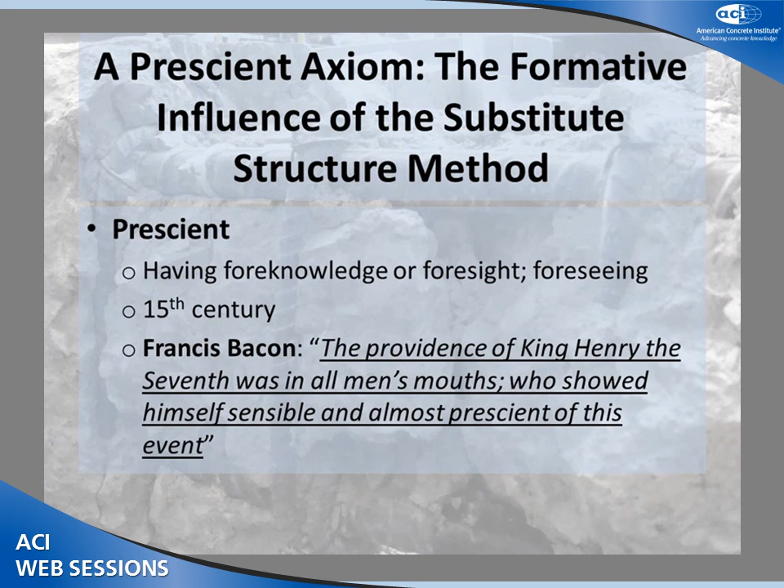The next word that I looked up was axiom. And again, as you all know, largely because we are in the sciences, an axiom is a proposition that commends itself to general acceptance, a well-established or universally conceded principle, a maxim, rule, or law.

Its first occurrence in recorded history is also in the 15th century, and I was surprised to find yet again a reference to Francis Bacon as one of the early users of the word.

My high school education, I'm sure, brought up Francis Bacon, but I really didn't remember all that much about him. So my next step was to look him up.

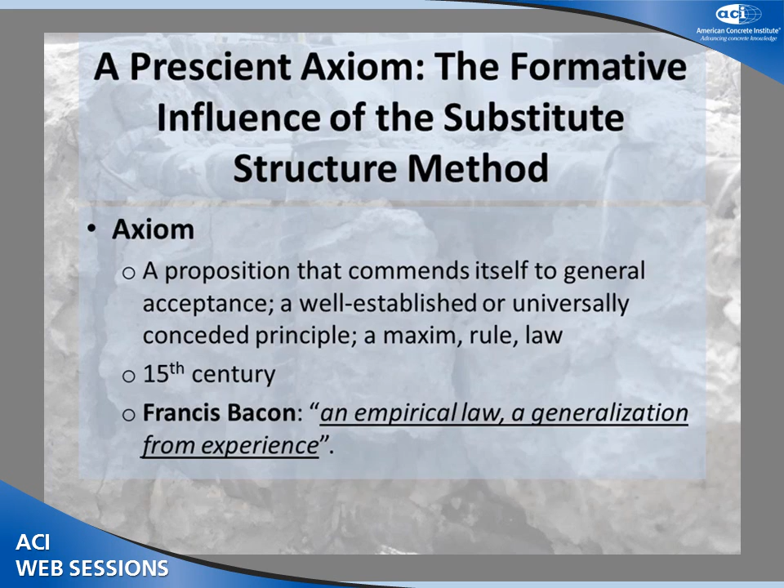And here's what I found, that Francis Bacon was a philosopher, statesman, parliamentarian, scientist, jurist, and author. He's actually credited with being the first modern empiricist. He's credited with being the developer of the scientific method.

He was a proponent of the inductive method of reasoning, demonstrating what is so by negation of what is not. He's known for deriving general axioms from what he called particulars, which were particular observations made during the course of scientific experiments or observations of nature.

Of interest to me is that he idealized physics into two branches, mechanics and magic. Some things never change. I guess at the end of this little inspirational exercise, what I decided is that Mete A. Sozen is kind of a modern-day Baconist, perhaps even a modern-day Bacon, who has really brought Baconian logic and reasoning and merged it with earthquake engineering to advance what it is we all do.

So with that as an introduction, I'm going to start discussing the pre-substitute structure era, the dawn of earthquake engineering in this country.

I'll pick up the pace here because I've got to get through this stuff fairly quickly. This all started really in the 1927 UBC, where earthquake engineering principles were in the appendix. The base shear coefficient at that time was 7.5% of dead plus live when the building is on firm soil, and 10% otherwise.

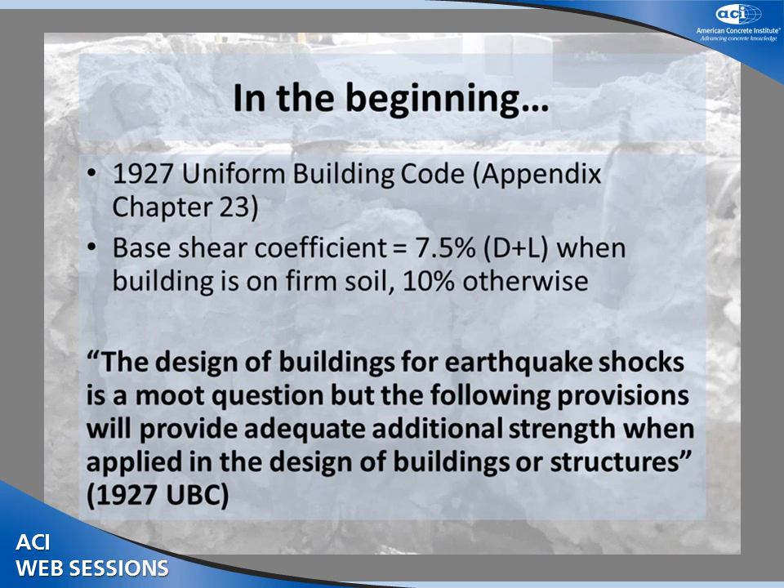The 1927 UBC contains this interesting quote. I have no idea really what it means, but it's interesting nonetheless: the design of buildings for earthquake shocks is a moot question, but the following provisions will provide adequate additional strength when applied in the design of buildings or structures. An interesting choice of words, a moot question, but I guess it tells us that back in 1927, engineers weren't quite so sure about what they were doing.

Advance to 1935, Uniform Building Code, the base shear coefficient reduced markedly from 7.5% of dead plus live to only 2% of dead plus half live. This particular reduction carried on through the 1946 edition of the Uniform Building Code.

I personally don't know the reason for the reduction. Perhaps it was related to the economy of the times when, in the Great Depression, the cost of building materials was very high, and we all sought means to cut back.

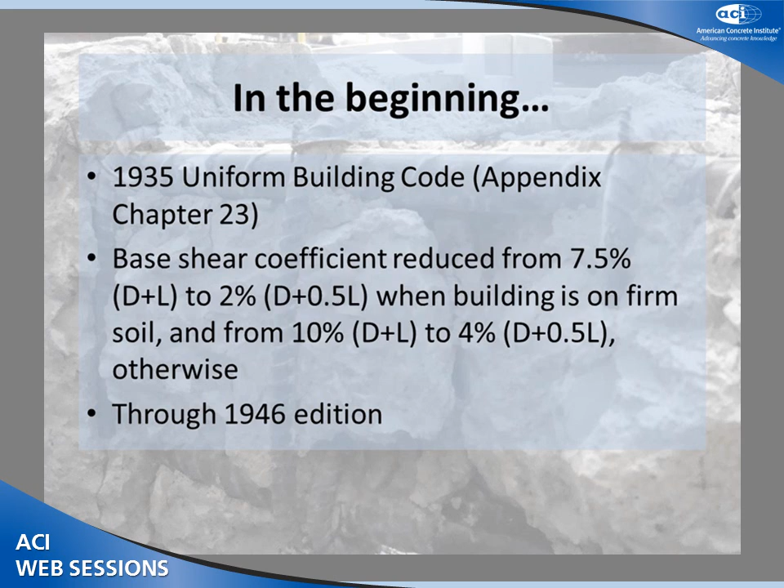In the 1949 Uniform Building Code, we suddenly have a change from the clearly statical mindset of the earlier building codes into something that seems to begin to accommodate the potential for dynamics as at least a player in the earthquake engineering problem. In 1949, we introduced a seismic coefficient that varied as a function of the number of stories, and as a building being designed got taller, the seismic coefficient went down.

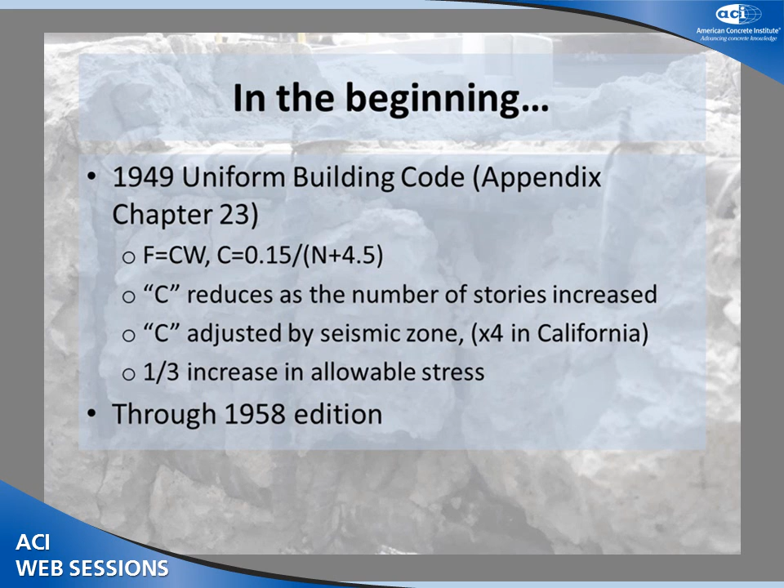This change kept in place through the 1958 edition of the Uniform Building Code. Now, stepping back a bit, in 1952 the San Francisco section of ASCE and SEAONC developed the first model lateral force provision specifically designed based on what they thought at the time was the best way to bring dynamics into the earthquake engineering design philosophy, and they did that by expressly introducing the concept of the period into the formula.

In 1959, the SEAOC Seismology Committee published the first Blue Book. In 1960, the Seismology Committee published its first commentary, and the recommendations of these committees were ultimately adopted into the 1961 Uniform Building Code, which contained a fairly radical departure from the earlier codes.

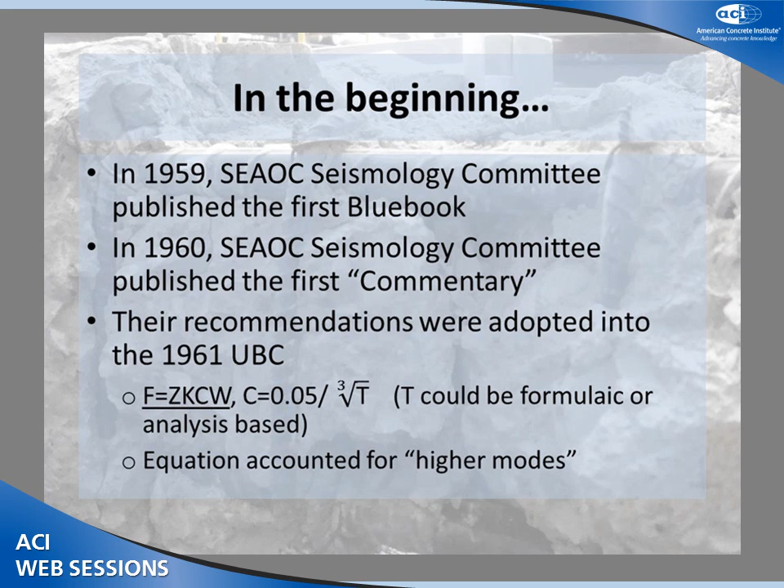It introduced a formula that accounted in some way for higher modes, and it introduced a coefficient K, which to some degree attempted to accommodate the notion that all buildings are not the same, and all building types are not the same. All structural systems are not the same.

Of particular interest to this session, the 1961 UBC incorporated a brand new concept. It essentially said that structural framing systems in buildings more than 13 stories or 160 feet tall were required to be ductile. That code specifically credited steel frames with moment-resisting connections as automatically being ductile. Other systems, however, such as reinforced concrete, were required to be proven by tests and studies to provide equivalent energy absorption.

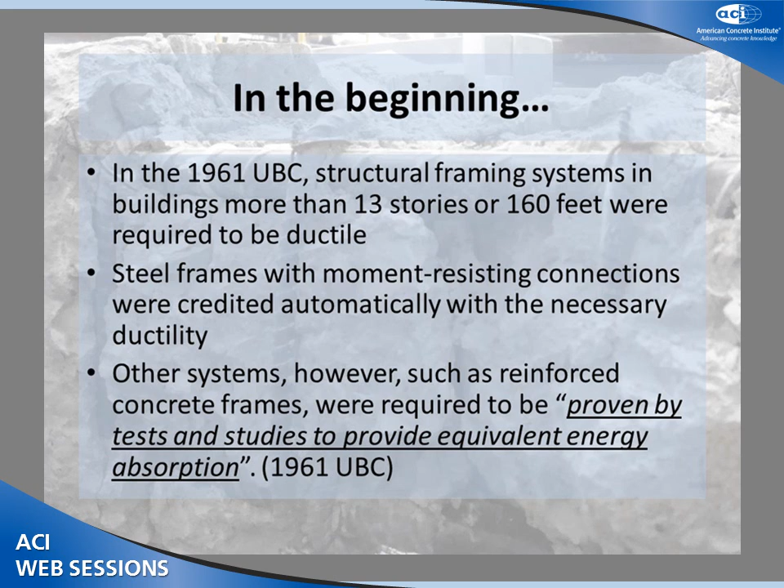This was the first indication that we practitioners in reinforced concrete had a somewhat higher hurdle, and thus there became an instant need for the 1961 book, which is the subject of this session. One might argue this is the reason for its existence. The book is a classic, and it contains much of what remains relevant today.

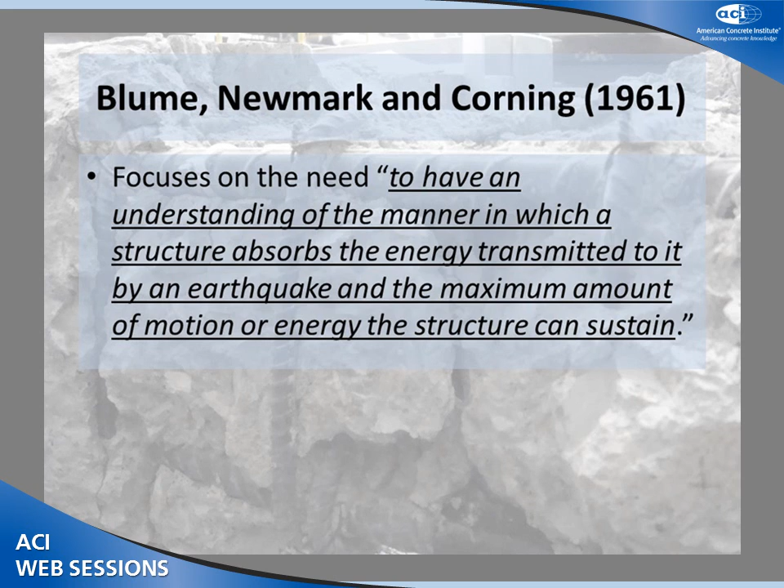Turning to that book, as Jack indicated, but in the words of the book itself, it focuses on developing an understanding of the manner in which a structure absorbs the energy transmitted to it by an earthquake and the maximum amount of motion or energy that the structure can sustain. This, at the time, was a brand new concept to the profession, and these folks really sought to characterize this concept and to transmit methodologies for accommodating it into the profession.

The book focuses on many things that underlie practice today. I'm not going to talk about all of it because really my subject is not the book, but is substitute structure, which came after the book.

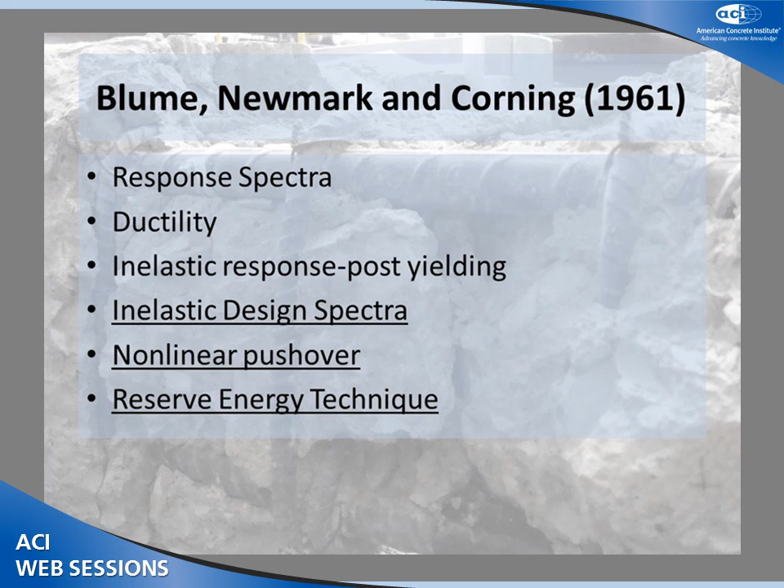To set the stage for the context from which substitute structure arose, I'm going to talk for a few minutes about inelastic design spectra, nonlinear pushovers, and the reserve energy technique.

I actually learned a tremendous amount that I'm going to share with you here in going through these books. It's interesting that the book contains only a single page of what I'd call conceptual discussion of inelastic design spectra. I'd read it before, looked at it 100 times, but it never quite occurred to me that the concept of inelastic design spectra brought out in the book was really in its infancy here, even for Blume, Newmark, and Corning. It was just being developed.

The theme I'm going to develop for you in the next few minutes is that there's a clear development of the concept, an evolution of the concept of inelastic design spectra over the course of 10 years. In any case, the book puts forth as postulates the notion of equal displacement and equal energy.

What's interesting to me in reading it is that the book never ascribes, as we would today, applicable period ranges or ranges of the spectra to either of these concepts. It doesn't talk about constant periods, and it doesn't specifically attribute equal displacement to just long period structures, for example.

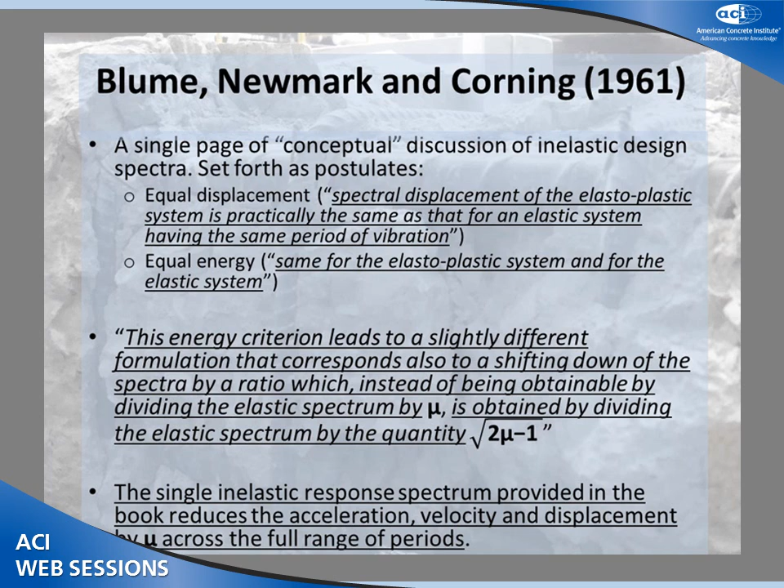Ultimately, I'll show you in one second that the single inelastic design response spectrum the book contains reduces the acceleration, velocity, and displacement by mu across the full range of periods.

This is the diagram from the book. I expect it'll be a little hard to read, so I've highlighted it for you. The upper curve, solid as denoted on the diagram, is the elastic response spectrum. The lower curve is the elastoplastic response spectrum. You can see the annotation that it's for mu of 4 to 6.

There is nowhere in the book that it specifically says this is the spectrum that should be referred to when trying to derive inelastic accelerations, say, or when trying to derive inelastic displacements. It appears to be the curve from which the designer is supposed to derive both, which is fascinating because this is precisely the concept that changed a number of years later.

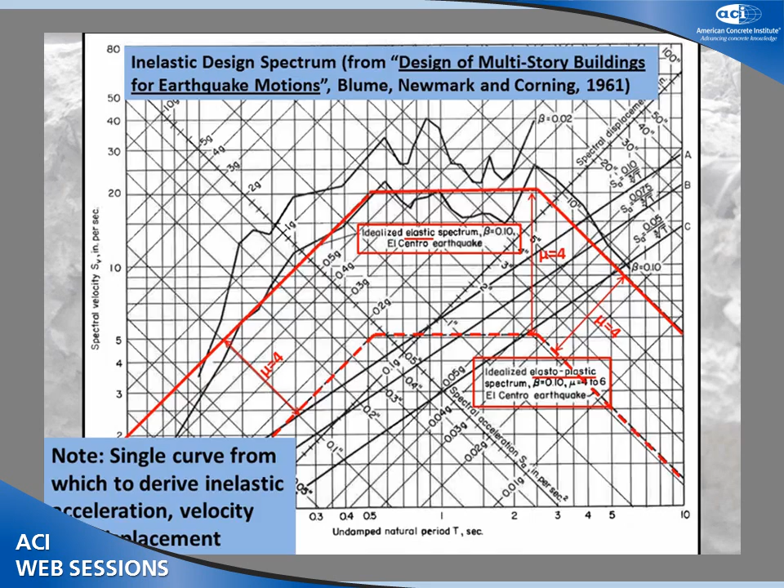At the same time, the book contains in the appendix a detailed description of another brand new method called the reserve energy technique, which was really Blume's method. The method relies in part on force displacement pushover type analyses. We all know what they were.

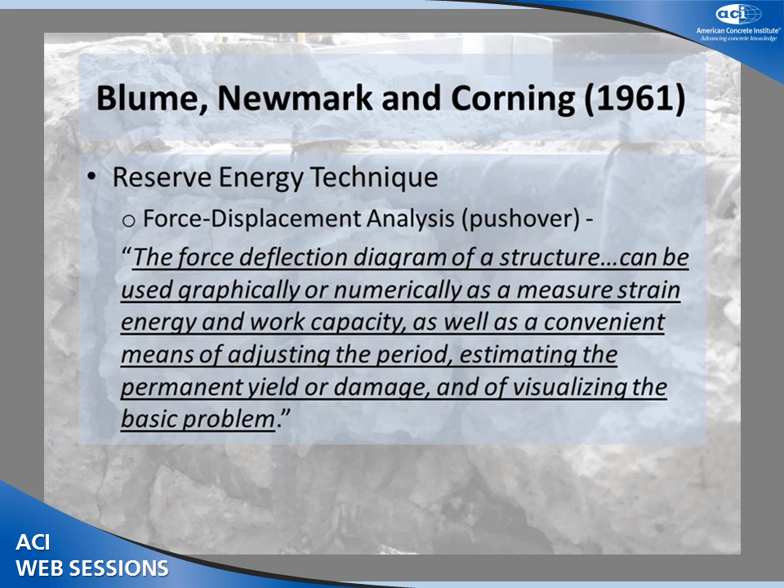If you read Blume's words, you can see that he's really thinking in a manner that we think today. This concept of looking at strain and energy and work capacity, as well as the notion of period shifting that he began to introduce, is really what we look for today as we evaluate and analyze structures.

This is Blume's diagram, which I'm not going to talk about in detail regarding reserve energy, but I do think it's interesting to point out two things. First, Blume is already thinking not just of the stiffness of the frame, but the stiffness of the frame and all the stuff that goes along for the ride and might participate in the process and might be non-ductile.

And again, for 1961, this is pretty advanced, I think, because there are lots of engineers who still don't think about that today all that well.

I also find this little diagram interesting, which I think is testament, if you read the words of the book that accompany it, that Blume acknowledges at this time it was very difficult to deal with entire building systems. The computational effort required really made him focus on single-story type studies, and that's what that diagram represents.

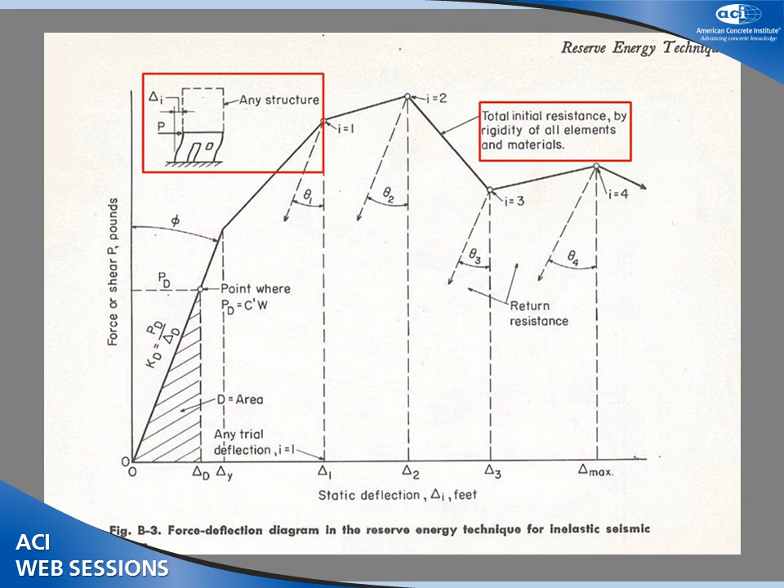This is a diagram that's not from the book, but it is John Blume's reserve energy technique. It's actually taken from a paper of Sig Freeman's from a while ago, in which he dissected the reserve energy technique based upon his long use of it. I'm going to point out a couple things: the technique, at least as drawn here, is only applicable in the constant acceleration range, the short period range. This really is fundamentally the technique.

You'll note that in accordance with this plot, this promotes equal energy, not equal displacement. The displacements, the elastic and inelastic, are clearly different. They differ by a factor mu. And in fact, the elastic and inelastic accelerations differ by a factor of the square root of 2 mu minus 1.

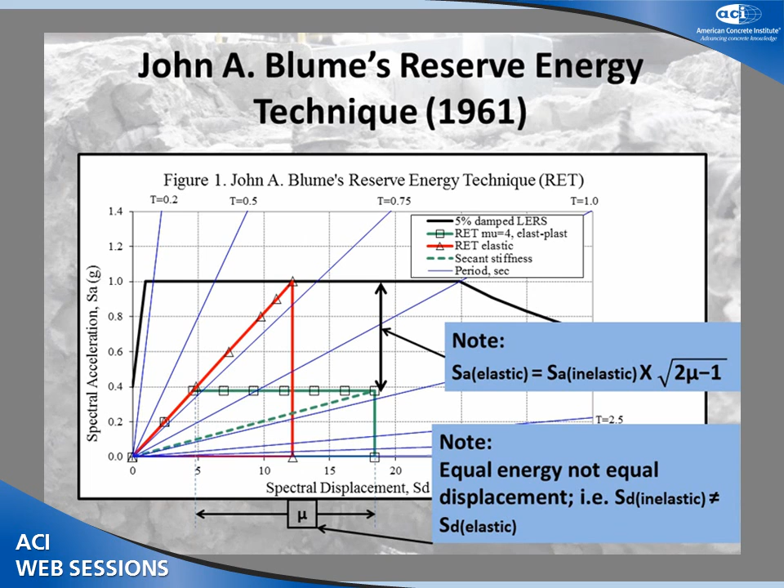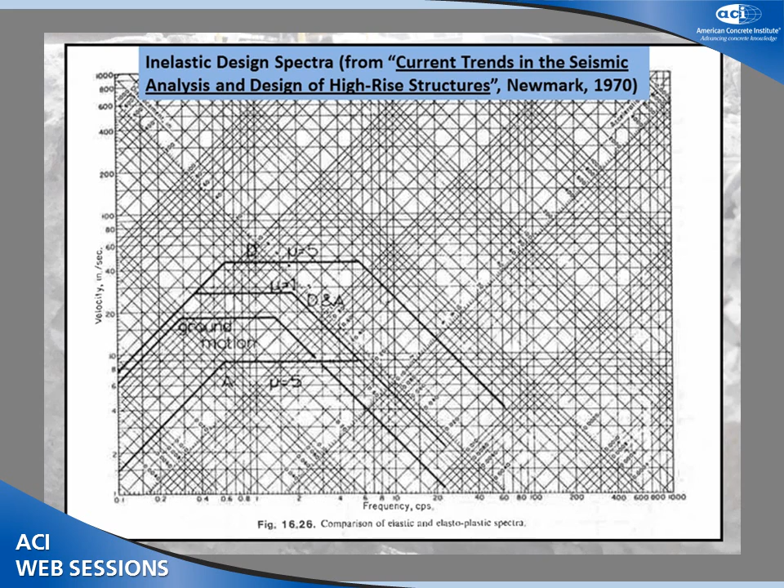Moving forward, time marches on. In 1970, in a paper called Current Trends in the Seismic Analysis and Design of High-Rise Buildings, or structures, Newmark introduces yet another variant on the inelastic design spectrum. At least this is the first variant that I've found, in which he proposes, essentially, that you can't have just one curve to identify the inelastic accelerations and displacements, that you have to have two separate curves.

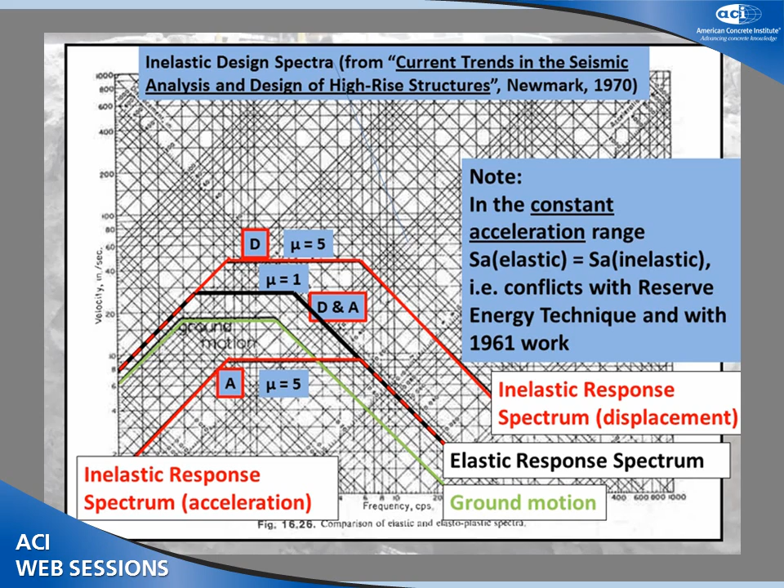What I will call out here is that this conflicts with the reserve energy technique, and with the work that he himself presented in 1961. And I'll point out one other thing here, or two other things.

If you look in the constant velocity range, what's fascinating is that in this particular depiction, the elastic spectral acceleration differs from the inelastic spectral acceleration by the square root of 2 mu minus 1. But also in the constant velocity range, the spectral displacements differ here by the factor of mu over the square root of 2 mu minus 1.

The reason I'm going through all of this is to tell you that when I learned of the inelastic design spectrum technique, I always felt that these guys had tapped into a fundamental law of nature, kind of like pi or E, that the square root of 2 mu minus 1 was a bit of magic they'd uncovered. But the reality is these guys during this time frame were fishing around for the right answer. You can almost imagine Blume and Newmark arm wrestling over what the right factor ought to be in what part of the spectrum.

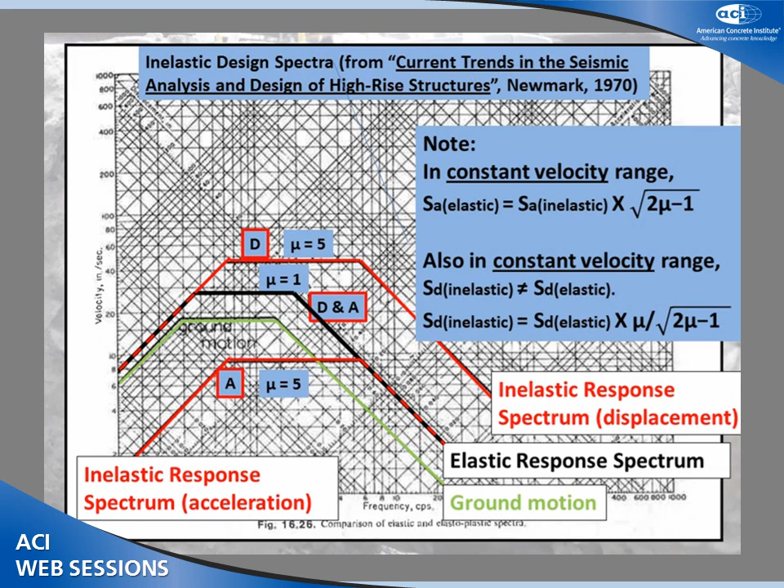It's fascinating to watch the development because even this presentation of the inelastic design spectrum was to change yet again in 1973. This is the form we know of it today, where in the constant velocity range, the elastic spectral displacement equals the inelastic displacement. Again, to contrast: here, in the constant velocity range, the spectral displacements are clearly different, elastic and inelastic. Here, they're not. Newmark has incorporated kind of a transition period range in which he goes from one curve to the other.

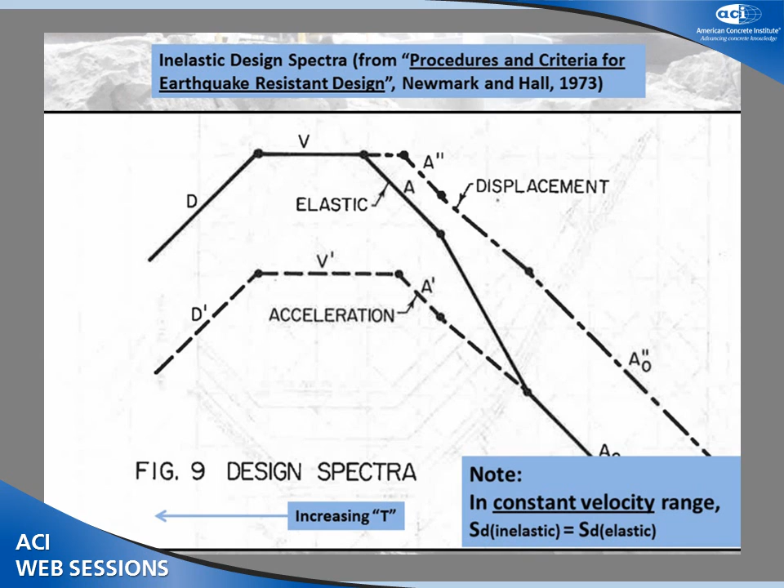This must have been a tremendously exciting time in earthquake engineering, because the early 70s is really a period of a few years when I think tremendous stuff was happening, including this.

Also in this time frame, in 1973, perhaps coincidentally, is when my co-author, while working for John Blume, first developed the capacity spectrum method, which was developed specifically to very quickly assess over 100 buildings. He was requested by John Blume to use the reserve energy technique to do these assessments, but found in applying it that it really didn't work outside the constant acceleration range. So he developed the capacity spectrum method to extend its applicability.

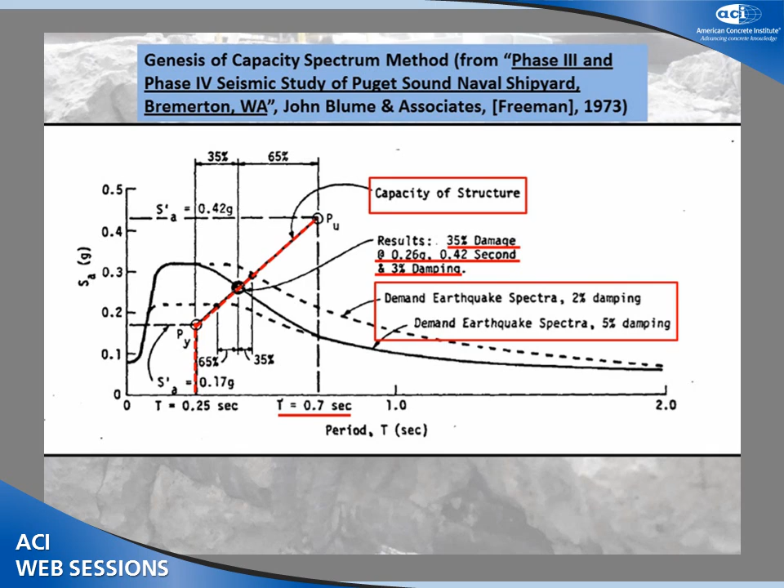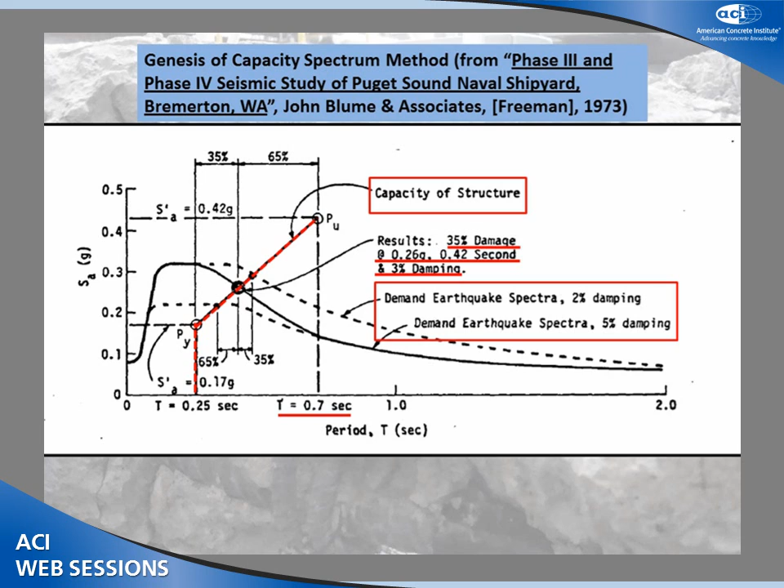This is it in a nutshell, at least in its early versions. You've all seen much later versions of it as it's been developed, but essentially, the early overlayment of the capacity curve on the spectrum, the incorporation of the concept that damping is changing as the building is moving, and the fundamental concept that the period of the building is changing, these items can help you assess the degree of damage the building experienced under any specific excitation.

The last introductory slide before we get to the meat here is this. It's important to understand that in this very same time frame, structural analysis was also suddenly moving into the foreground.

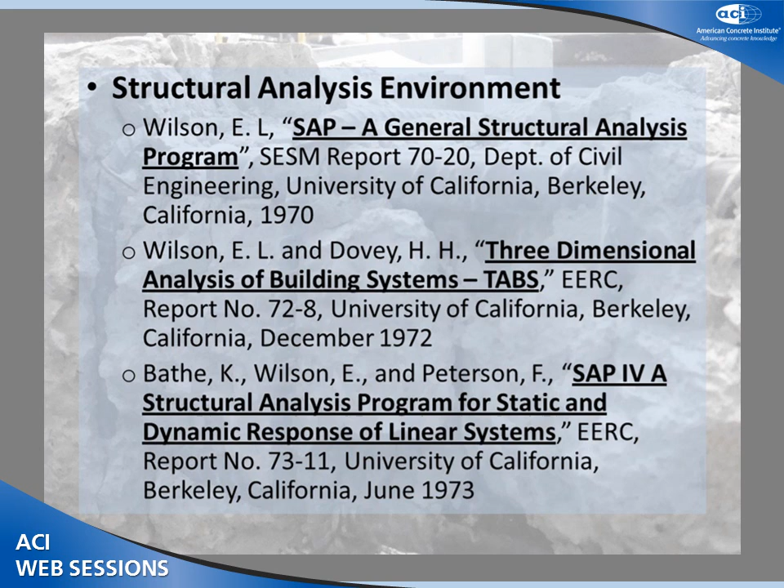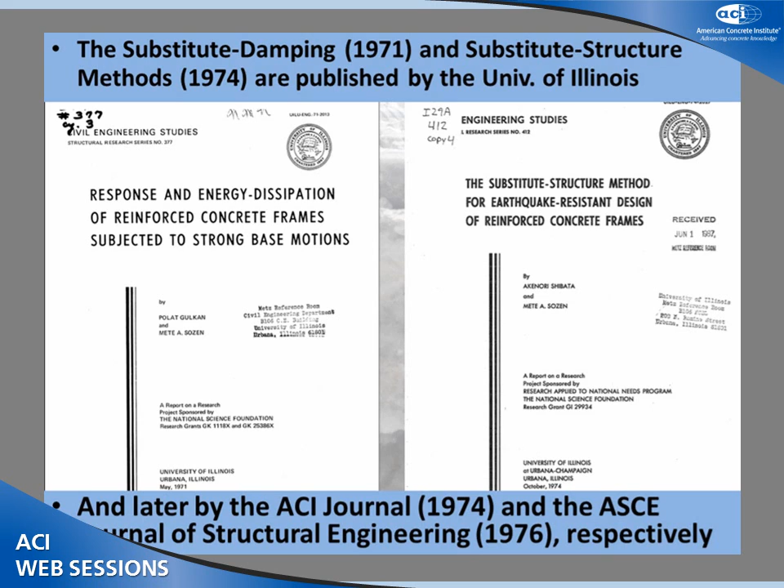SAP was developed in 1970, TABS in 1972, and SAP-4 in 1973. In 1971 and 1974, essentially the substitute damping and substitute structure methods were released. I'm not going to take time to differentiate between the two.

They're very heavily intertwined. It should be understood that prior to the substitute structure method, all design methods were force-based. Essentially, they all began with the calculation of design forces based on the elastic period. There was no substantive consideration of displacement.

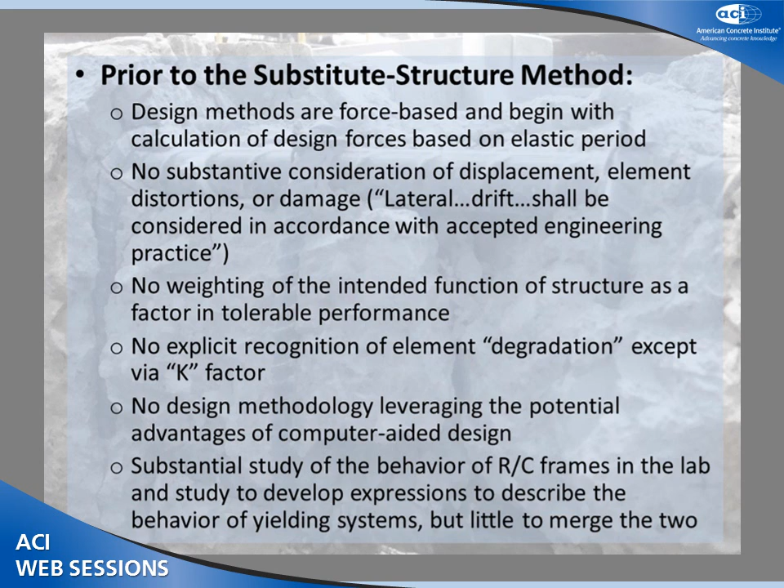There were many things that the substitute structure method fundamentally changed when it came out, and I'm going to have to jump to some of them. The substitute structure method was, in fact, seminal, revolutionary, and transformative. It single-handedly discarded the idea that seismic design ought to commence with a determination of design forces.

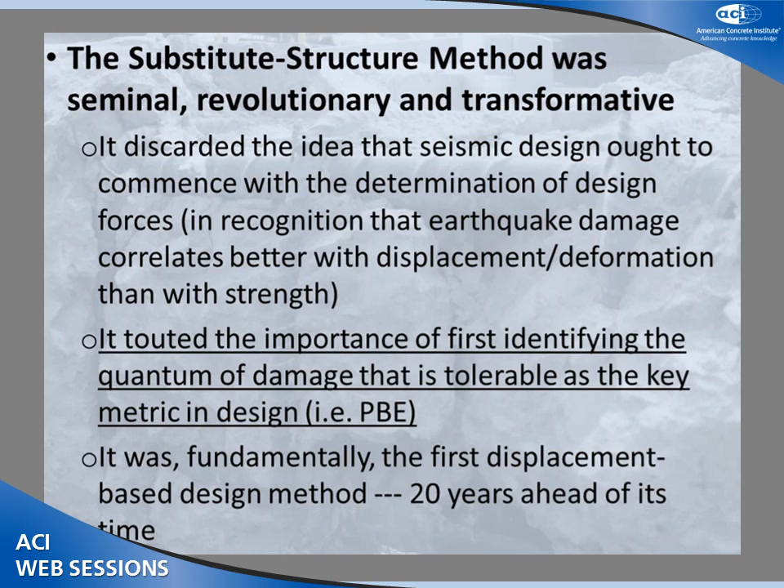It touted the importance of first identifying the quantum of damage that is tolerable as a key metric in design. This fundamentally is performance-based engineering. This is what we do today. We start by saying, how much damage can we tolerate? This concept really was fundamentally the first displacement-based design method.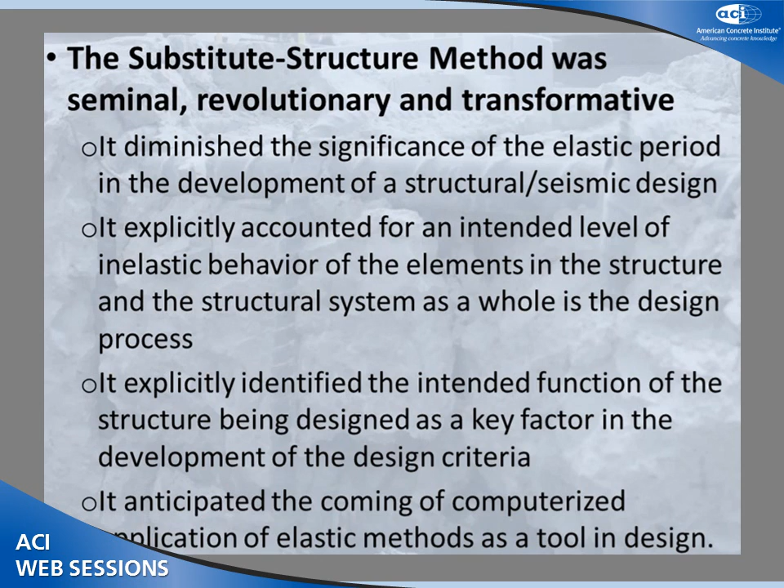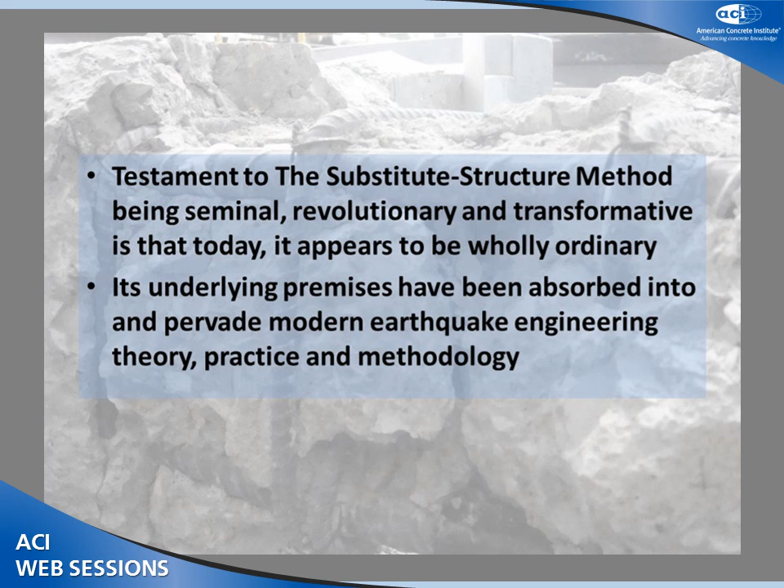As importantly, it anticipated the coming of computerized application of elastic methods as a design tool. The testament to the substitute structure method being seminal, revolutionary, and transformative is that today it actually appears to be wholly ordinary. We accept its principles without thinking twice about it. Its underlying premises have been absorbed into and pervade modern earthquake engineering theory, practice, and methodology.

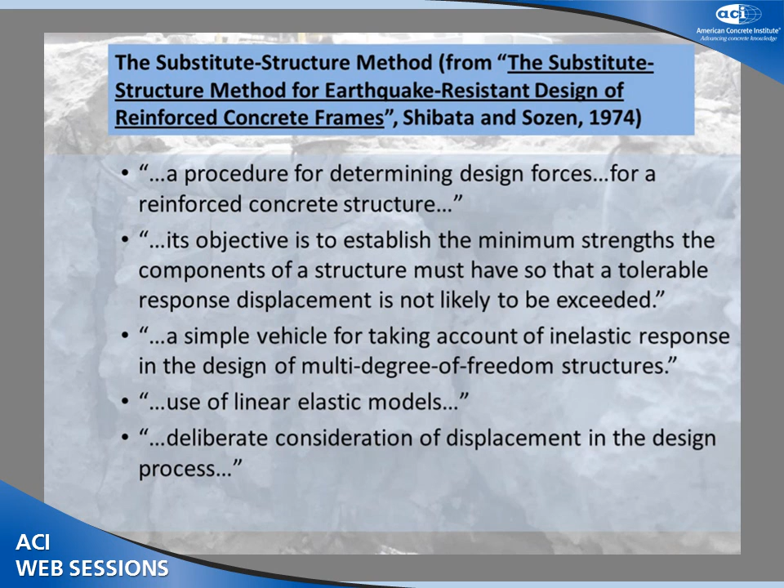I'm going to skip a few slides because I'm running out of time, but for anyone who later wants to look up the presentation, I've included some words from the documents that presented the substitute structure and substitute damping methods. Essentially, the method starts by determining the stiffness of a substitute frame based on predetermined tolerable limits of inelastic response. This really is the leap between it and substitute damping.

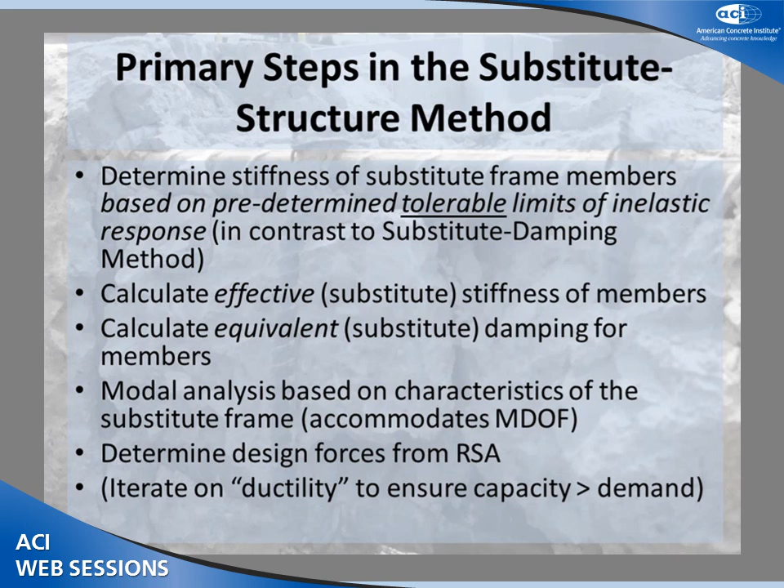Substitute damping did not contain an explicit initiating predetermined tolerable limit, I guess, as the jumping off point for design purposes. This is the method as it's been put forth in the papers. And again, I will skip some of this, but essentially the method, as I indicated, really begins with identifying a tolerable damage ratio, identifying the secant stiffness associated with that for individual members in the building, and then performing an analysis.

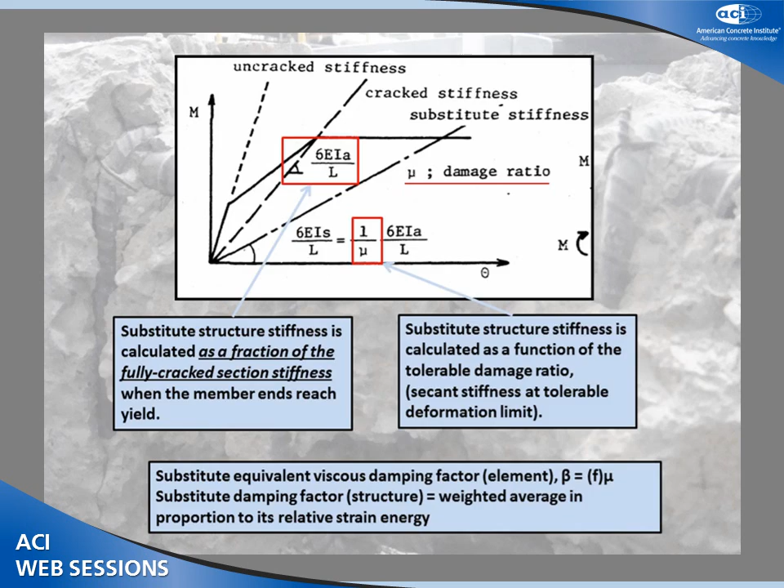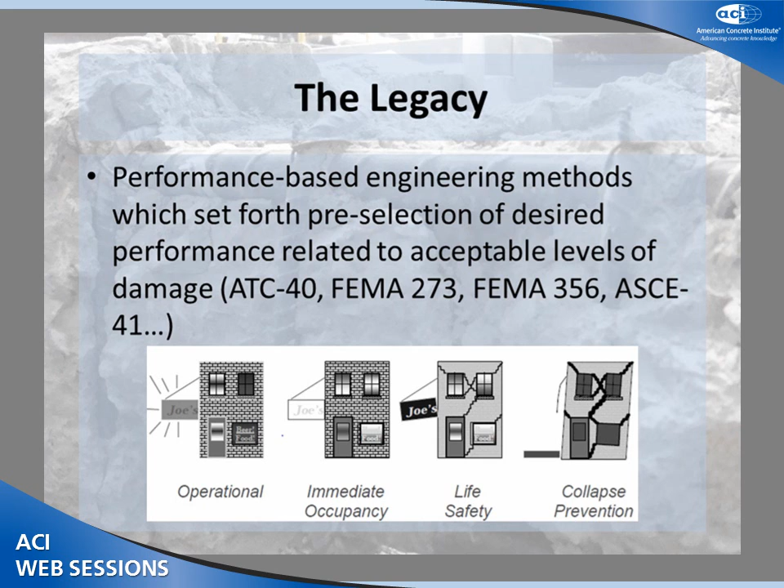The legacies of substitute structure are many. I would tell you that performance-based engineering methods, and in particular things like this, wouldn't have happened had substitute structure not articulated concepts first. I would tell you also that displacement-based design methods, which are coming to the fore really in the last 10 years, almost every conference you go to now contains, and almost every journal edition contains articles on displacement-based design methods,

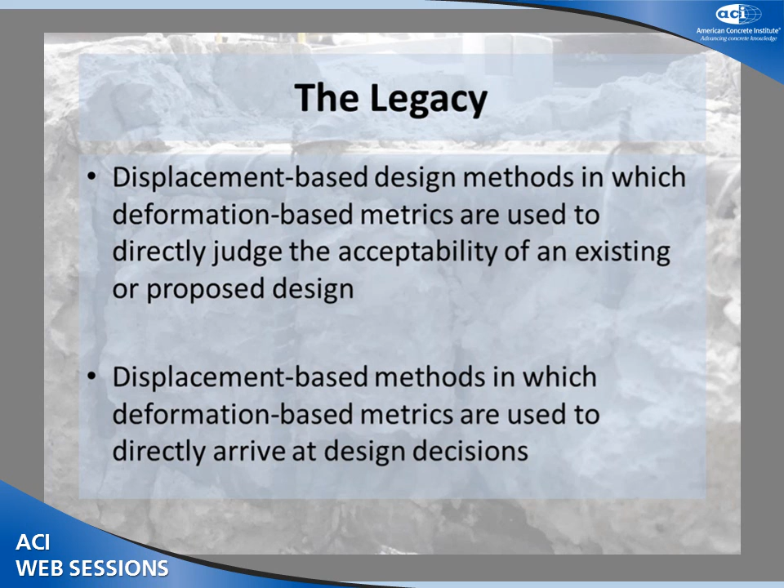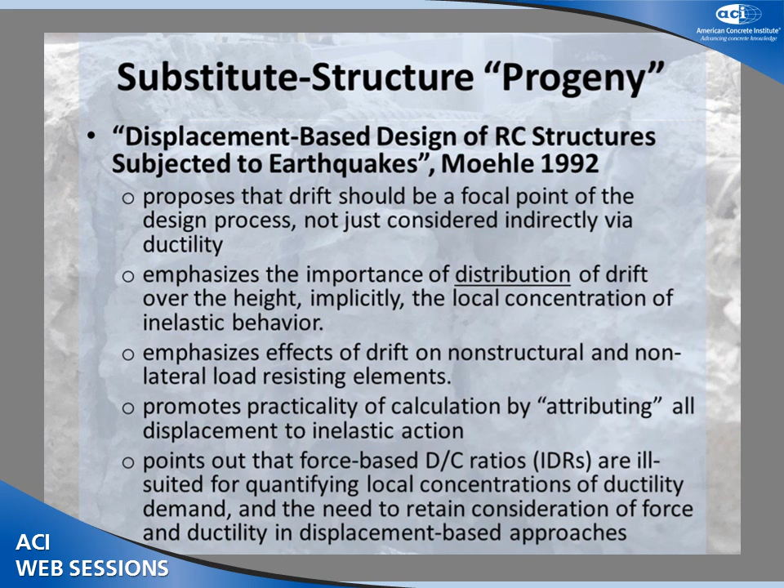most of which make reference to substitute structure and or substitute damping. I have a list of about 6 or 7 of these methods, but you can look them up independently. One of them, of course, is Jack Moehle's, proposed in 1992. And so I will rush right through them to my closing. Some of these are great methods, by the way.

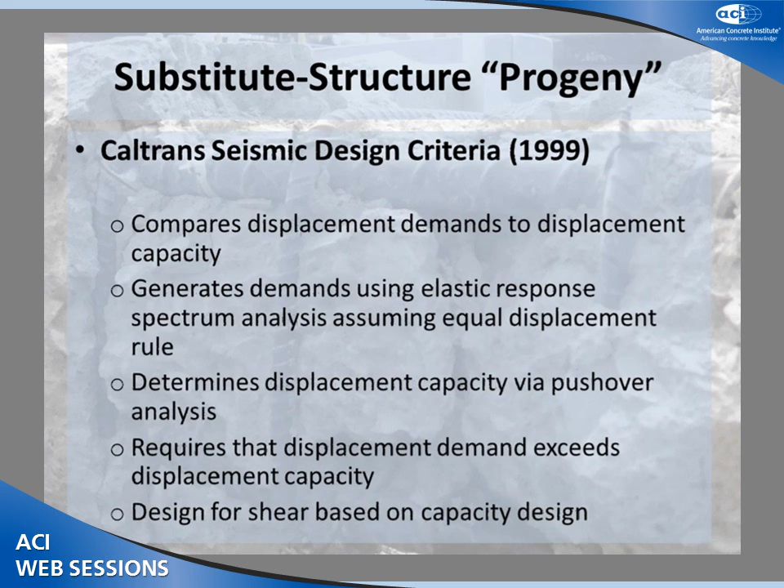Okay, closing. Essentially, the lineage and much of the approach and philosophy of earthquake engineering today, even at the leading edge of what we do today, can be traced back to the work and influence of Mete A. Sozen, as exemplified by substitute damping and substitute structure.

The prerequisite to performance-based assessment, being the pre-selection of acceptable performance objectives, was first really articulated in substitute structure. Mete A. Sozen has long stressed that deformation-based metrics, not strength, ought to define the primary seismic design criteria for securing desirable seismic response. This is a position that's now taken for granted by the rest of us. Thank you.